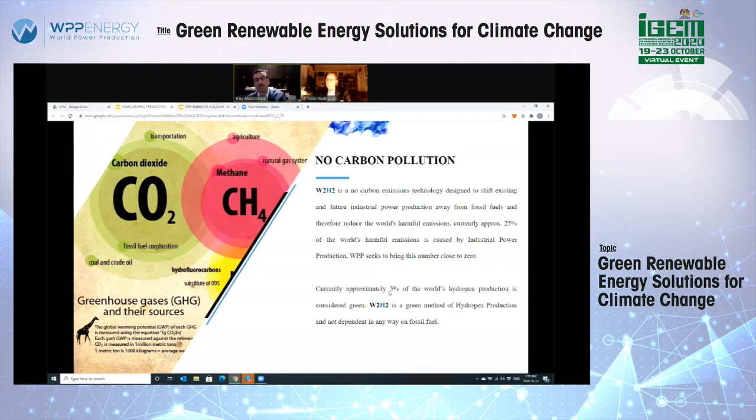Presently, only 5% of the world's hydrogen production is considered green. W2H2 is a green method of hydrogen production. That's very important. So target markets, I want to talk a little bit about this piece. So presently, from all the hydrogen gas that's produced, about 95% of it is consumed in the petrochemical sector, ammonia being a big consumer.

The implications of W2H2 are that the hydrogen will be produced at a price point which allows it to cross into new markets and allows it to redefine the share of energy production that renewables represents. So it has the potential to transform the entire sector by shifting the current consumption where 95% is consumed over here and bring it over here and start to eat into the fossil fuel power generation market share.

Presently, it's too expensive to produce hydrogen to justify burning it in thermoelectric applications. The economics don't work. So presently, it'll cost you $3.50 to $4 to get one, when you figure out your cost of production at 44 to 55 kilowatt hours. And then you figure out what you're going to get on a power purchase agreement, for example. It doesn't work.

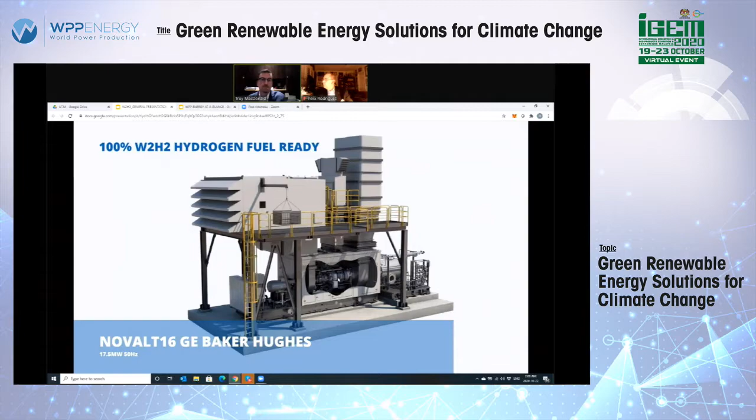Many of the markets in need of power, many of you know this already. That's not unique to W2H2, simply target markets for products. We offer complete turnkey services, so someone who wants us to come in and do a hydrogen project, we're there until commissioning and beyond for service. We offer all-time contracts as well.

And I spoke a little bit about the power generation side and about W2H2 taking hydrogen into the power generation sector. The transportation sector is also a huge growth area. Most applications right now in the transportation sector are fuel cell related. They're more efficient than direct combustion. With the cost of production coming down, the implications for the transportation sector will be huge.

It will take it into the shipping industry. There are prototypes and pilot projects of ships right now, merchant ships and cruise ships, using hydrogen. But this technology will take it into mainstream marine applications. And the transportation sector, along with the power generation sector, represent approximately 50% of all global CO2 emissions. This W2H2 solution is designed to eradicate the CO2 from about 50% across the world.

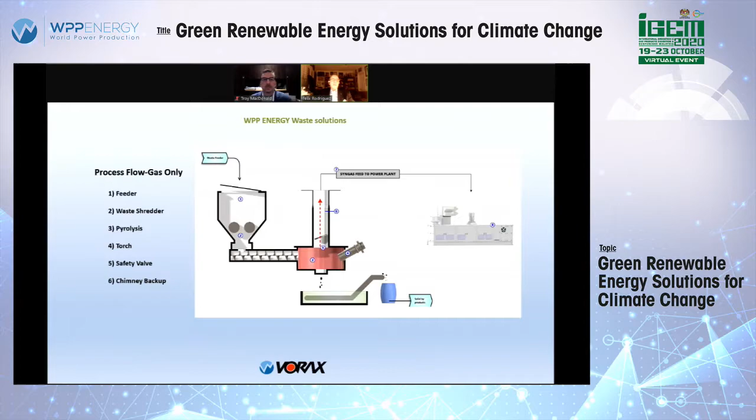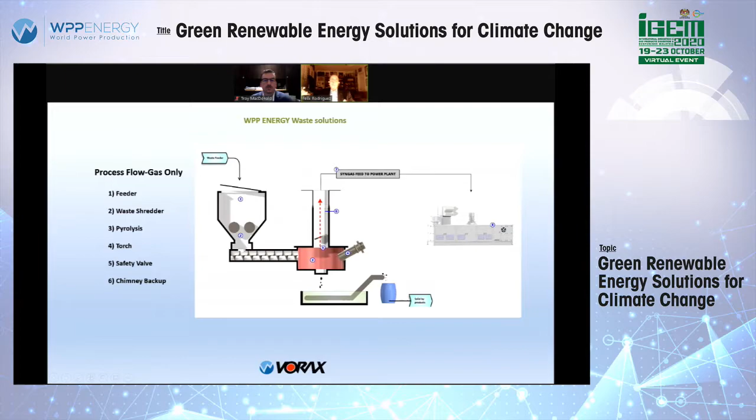This is a syngas feed to a power plant, for example. So you saw the earlier one. This is steam. This is syngas. Our partners, Siemens and Baker Hughes, the SST series are terrific series of gensets. And of course, the steam turbines from Baker Hughes, so GE as well.

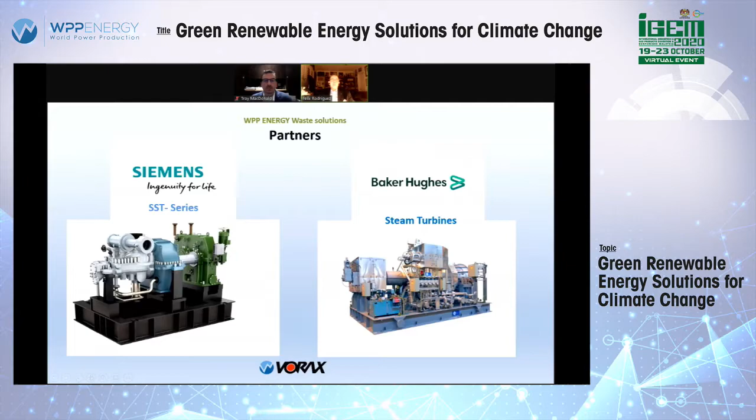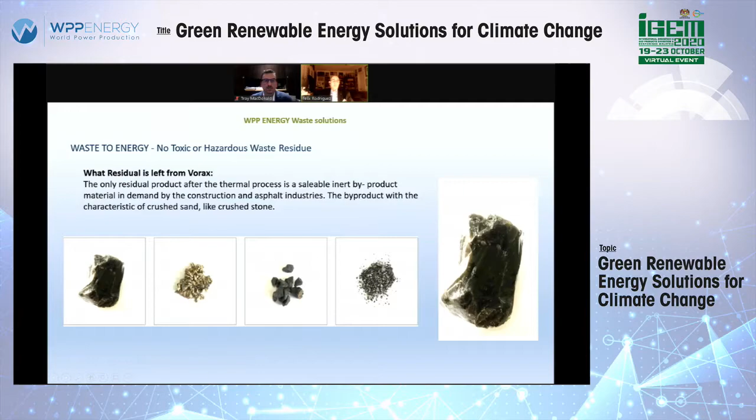Here's an example of our no toxic or hazardous waste residue. This is a slag that can be used to build roads. As a matter of fact, we talked about building bricks from these to build houses and roads, etc. Here's another example of a plant. And I point out the storage area here for a couple of things, water as well as the LNG that we need to run it. And we'll talk about removing this from our infrastructure as well.

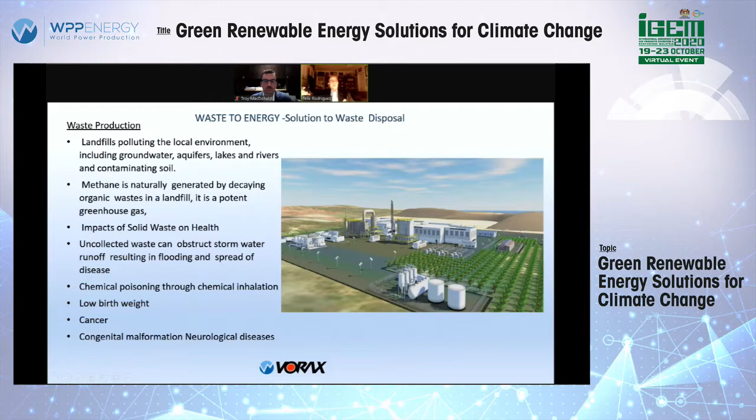So we know that the landfills are polluting the local environment. As a matter of fact, I just came back not too long ago from an island that had 22 landfills, and they're closing 17 of them because they have no place else to put their waste. So it's a huge problem nationwide and worldwide. But some of the things that it causes: the poisoning, the low birth weight, the congenital malformations and neurological diseases. So it's important that we address those issues.

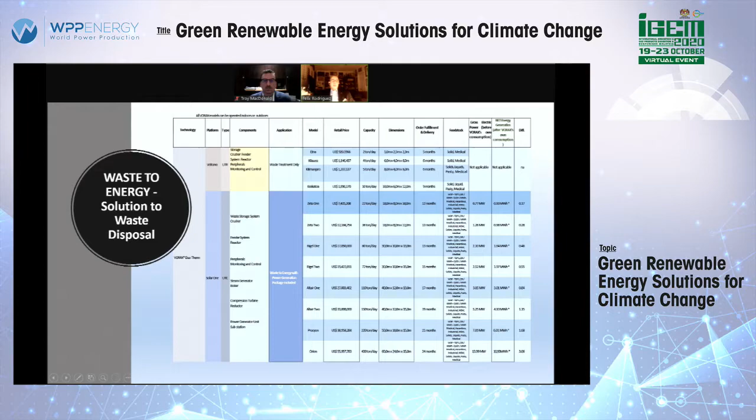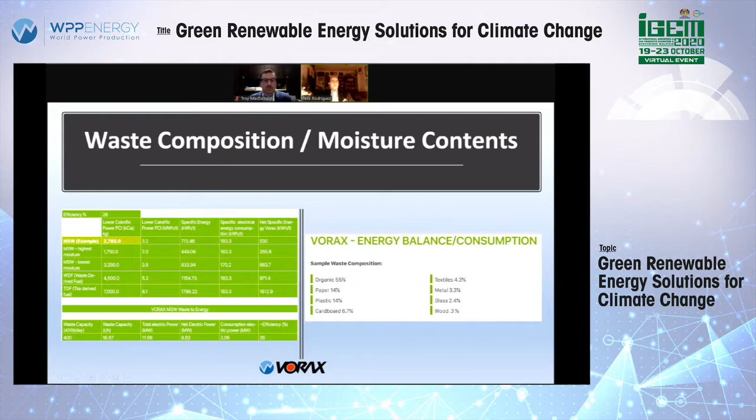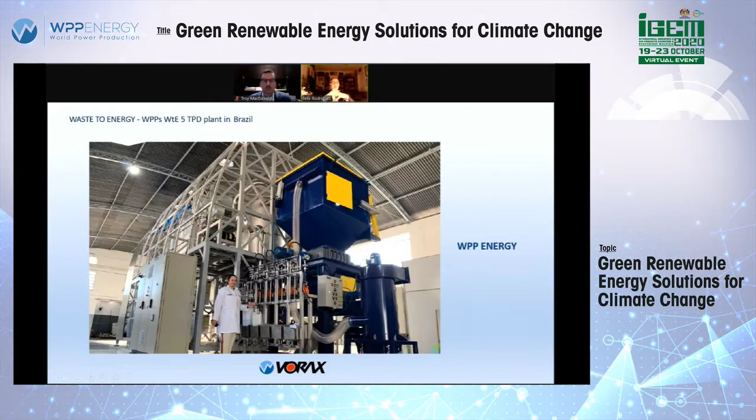Here's an example of a waste to energy plant in Brazil. This one went to one of our customers there, and it's working very well. It's a pharmaceutical. It's important to talk about the tariffs as well, what they are. You might want to look these up in your specific countries and find out what the inputs are, the cost of the inputs to put into your financials as well, and we'll help you do that.

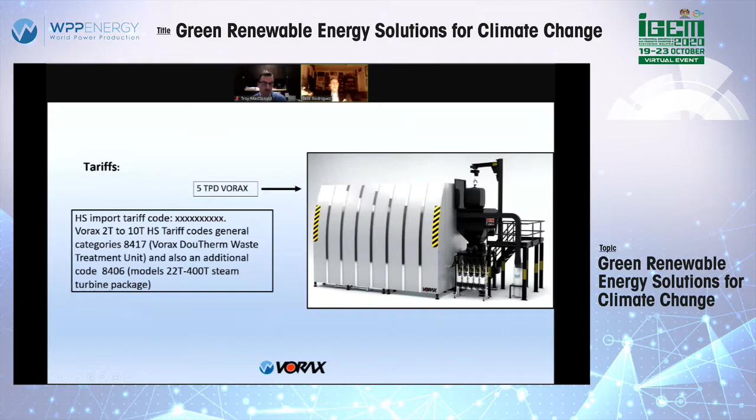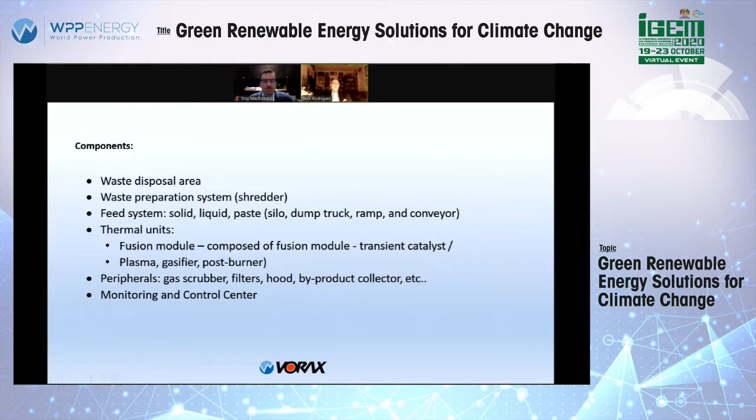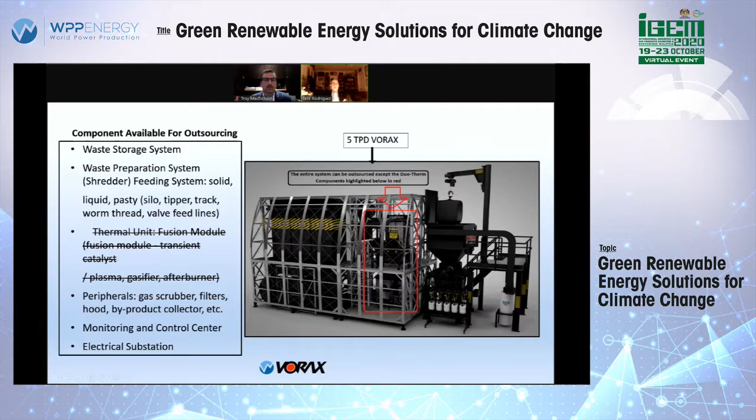Here is what I mentioned earlier, that we cannot outsource this part right here: the thermal unit and the plasma gasifier. Everything else here can be done locally through an EPC, and we'll be able to negotiate that and help you lower the cost, the OPEX and your CAPEX. We have a maintenance warranty.

This one is the extended warranty that I mentioned earlier. It's up to 3 years, and it's 10% of the original purchase price as reflected on the original invoice. Make sure that you know and understand what that means.

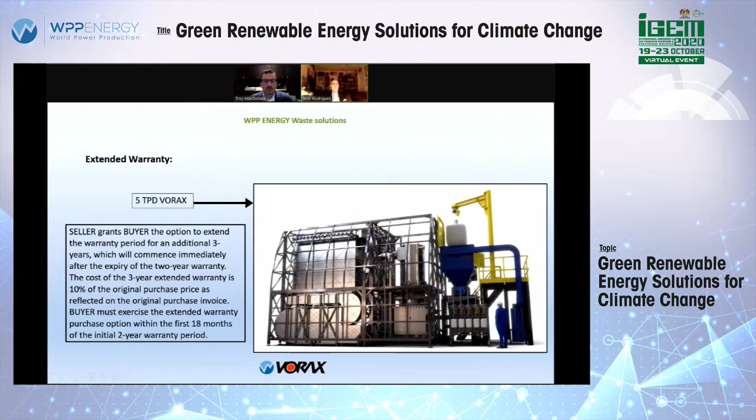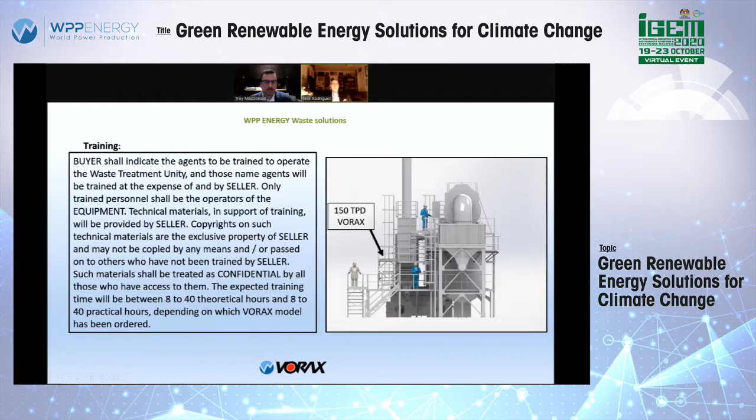Talk a little bit about our mission and our vision, because we want to make sure that the world understands what we're about, what our company is about, and what we want to do to be environmentally friendly in our methods of waste disposal and be a solution to the growing demand of renewable energy and clean water. And our mission is to provide global sustainability through innovative and environmentally friendly technology. Make sure that the world takes advantage and stops destroying our environment.